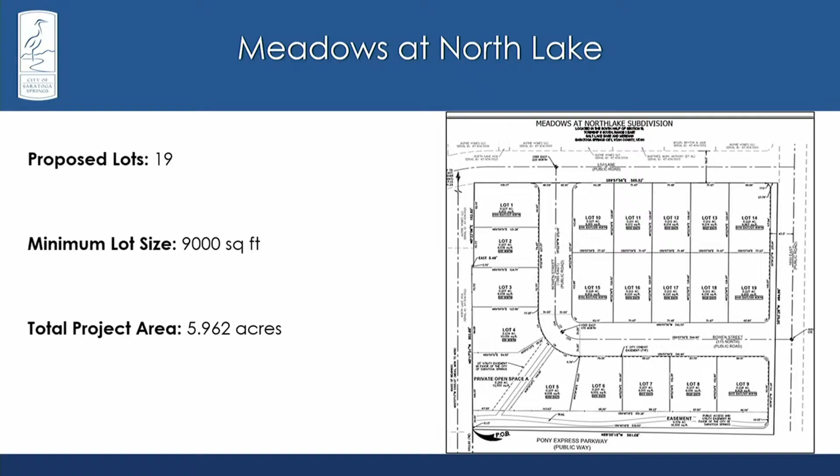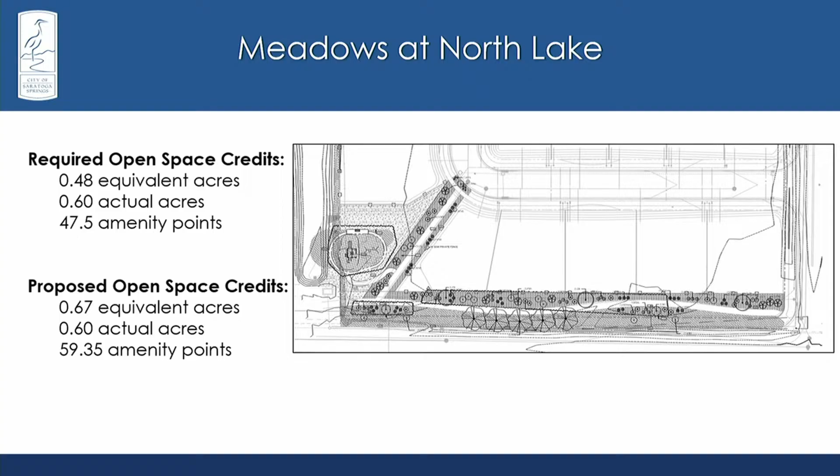This is just showing that it meets the open space requirements and all the proposed landscaping, and it meets all of our amenity points, and everything complies with our code there. So that's all that planning has.

Is the developer here tonight, and would they like to add anything to the presentation? Come on up, and if you can just state your name and address for the record.

Keaton Morton, 1987 East Brenner Street, Saratoga Springs. Just want to thank your staff, they've been fantastic to work with. This is like the 5th project over in this area that I've done, and your staff's awesome to work with. So, no question, but do you guys have any questions for me?

We'll go ahead and open for commissioner comment and see what we got. Commissioner Hill: Sam, thank you. As I was going through the details of comply and not comply, there was something that talked a little bit about size, height, and drainage, and a 3-foot fence and grading that shall comply. Can you talk about that? I'm looking for where.

It'll take me just a minute, because everything was compliant, shall comply, everything and/or comply. But there was just, as I read through it, it talked about fences being 6 foot, but there was a place that talked about a 3 foot high fence and grading. It wasn't that important to me, but I just wanted to make sure I understood that. Yeah, so I believe I should have changed it to comply, but I believe I had some shall-complies, and it was more so just, as long as, because engineering was doing the review at the same time, making sure that it complies with engineering and everything in regards to drainage. So it does comply.

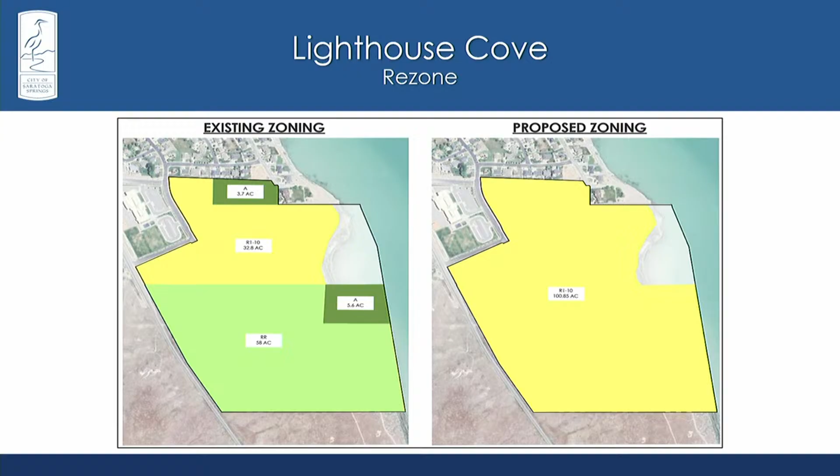Okay, good to be back. So this is for a rezone, and concept isn't required, but felt like the concept would be very useful, so it's also included for this rezone. So it's proposed for the area just on Schooner Drive. There are 109 acres, currently part of it is zoned R1-10, but also agricultural and rural residential. So the proposed zoning is R1-10, which matches the general plan, so it would all be changed to R1-10.

And for the concept plan portion, the proposed is 197, or it may be more depending on the applicant. They are working with the church to see if there's a potential church site. So depending on if there will be the church or not, there would be a few more, up to about 215 lots if they do not do the church, but if they do, then it would be 197. We're currently working on our development agreement with that language. The minimum lot size for R1-10 is 10,000 square feet. Here's what they have as their concept plan. That's all that planning has right now.

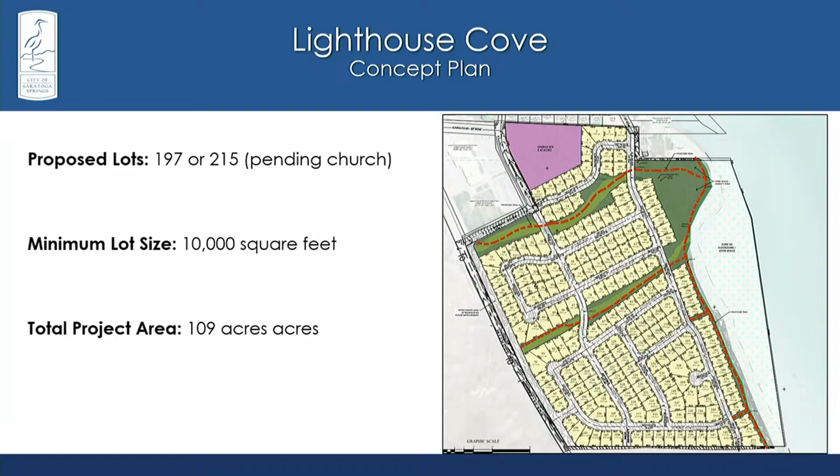Okay, we will open for public comment. Seeing none, we'll close public comment, and if the applicant would like to add anything to the presentation tonight, they are welcome to join us.

Please state your name and address for the record. Lindsay Neve with Perry Homes, located at 17 East Winchester in Murray, Utah. I don't know if there's anything necessarily I'd like to add other than we're in general conformance with the general plan, and we are looking forward to continuing working on the project.

Okay, thank you, we'll go ahead and open for commissioner comment. Commissioner Hill: thank you, Sam. Again, this is a concept plan, so it's just kind of dipping the toe in the water and getting an idea of what needs to be done. As we read through that, we see so much that still needs to go, and not to be critical on any of that because we're just starting. But could you give me the average density for the area? I didn't see that in the write-up.

Yes, let me find it on their concept plan image on the side margin. It states 197 units with a density of 1.8. Sorry, lot per unit count is 197. Apologies, so 1.8 - if it's 215 it'll be a little bit more than that, but because it's a single-family product with larger lots, it's pretty low density.

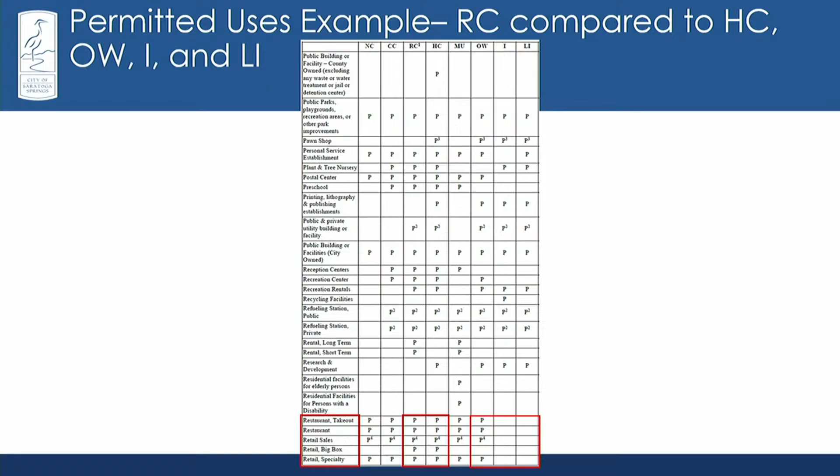Good evening, Commissioners. Yeah, so when we do code amendments, we don't always see the unintended consequences. So these were meant for the additional standards, meant for big, huge office warehouse buildings, the large, gigantic ones. The thing is, in these zones, you can also have restaurants and retail, little small stores and stuff like that. So that's what those are. So this is what they, some of the things that they require, the additional standards.

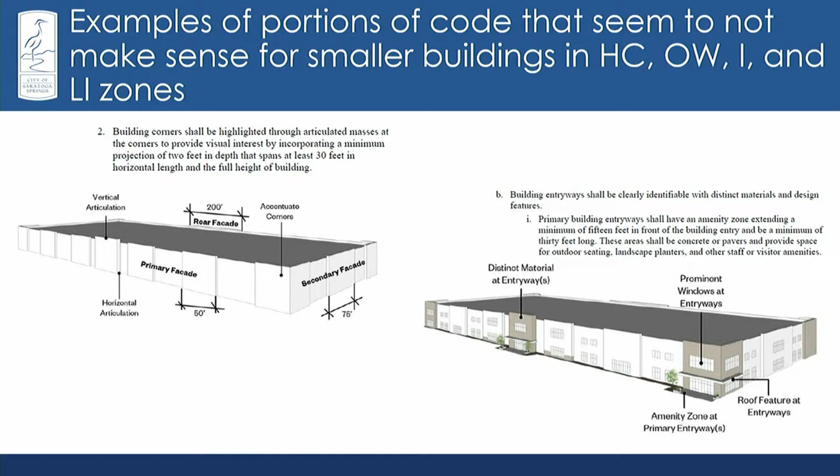So it's additional corner accentuation and stuff like that. And then these amenity zones where it's 30 feet wide and 15 feet deep of extra attention to the main entrances. Well, you get these smaller buildings that may have 3 to 5 businesses in it, and they may only be 180 feet long or 160 feet long. Well, now 30 feet of that for each one has to have that zone. So really, the whole front of that building has now become a huge amenity zone.

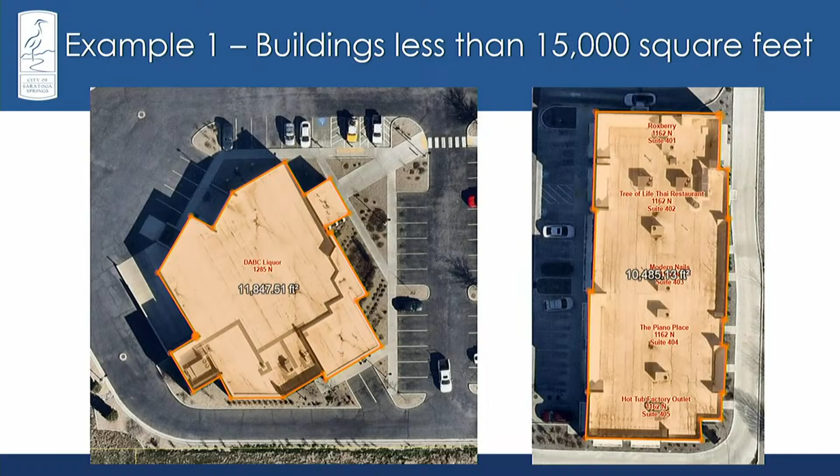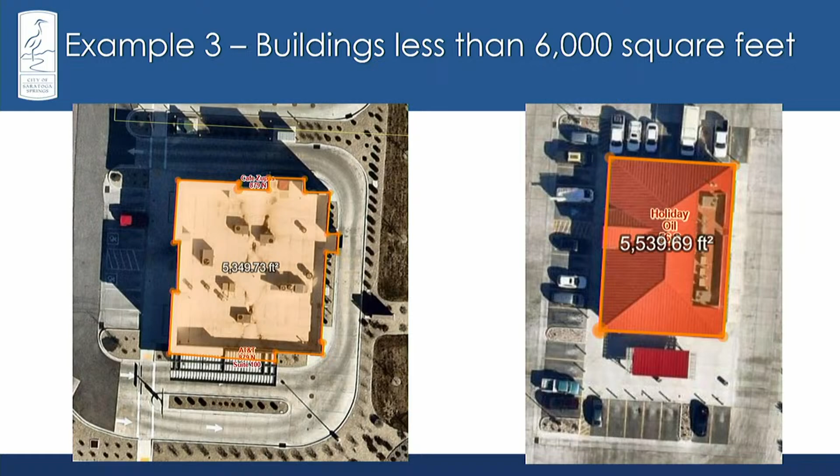So I put some examples of buildings that are less than 15,000 square feet, so you can get an idea of what we're talking about here. So this liquor store is under 12,000. This one over here is Roxberry, that Thai restaurant and stuff like that over kind of by Mobetis. It's 10,400. Frontage-wise, it's only 124 wide at the liquor store, 160 at the other one. These ones are less than 6,000. You have your Holiday Oil, and then your Zupas and AT&T, they're less than 6,000.

But if you look at the entrance on this one, for Cafe Zupas, you have 2 businesses, so you'd have 60 feet of that frontage that would have to be amenity zones. So really you have 18 feet that isn't. So it doesn't make sense for these smaller buildings.

So what we're asking for is an exception: if you're smaller than 15,000 square feet and your frontage is less than 200 feet wide, those additional architectural standards do not apply. They still have to meet all the other site and architectural standards, just not the additional ones meant for the huge buildings.

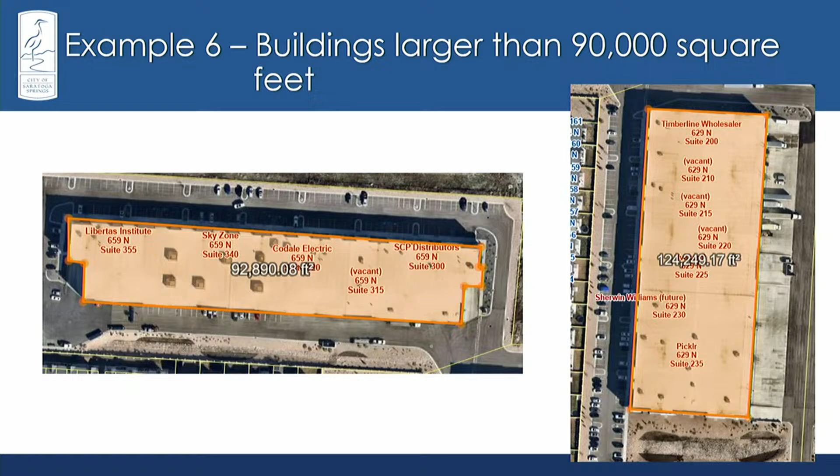So the example of the big ones - you have the one over by Sky Zone, that's North Shore Commercial, it's 92,000 square feet. The one south of that, also North Shore Commercial, is 125,000 square feet, 700 feet wide, 550 feet wide. That's more what we're looking at when you do your amenity zones for the bigger ones.

Do you have any questions on that? Let's open up for public comment first. Seeing none, we'll close public comment and now open for commissioner comment.

Commissioner Rather: Thanks, Kendall. I appreciate it. I work in this particular zone currently, on some projects of my own. I think it's totally applicable - in fact, personally I think it's still a little on the long side for the amenity zone, but I think it's a good improvement because, like you pointed out, some of those buildings it just doesn't make sense. So anyways, I just want to support it. I think it makes a lot of sense. I appreciate it, thank you.

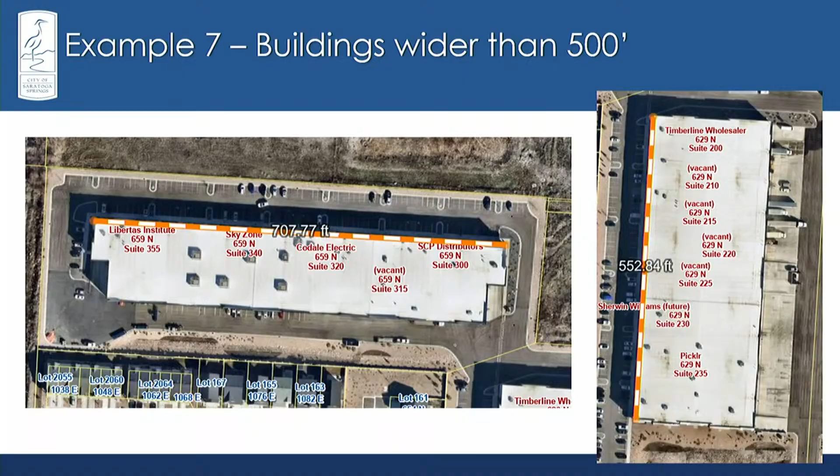Where you feel like it's a little on the long side, is it worth discussing other things with this at this point? Well, I just mean, for example, you showed Zupas, I don't remember the exact length, but 80 feet. So it's still under, because you took it up to 200. If you feel there's a different suggestion to make - no, actually that does seem appropriate.

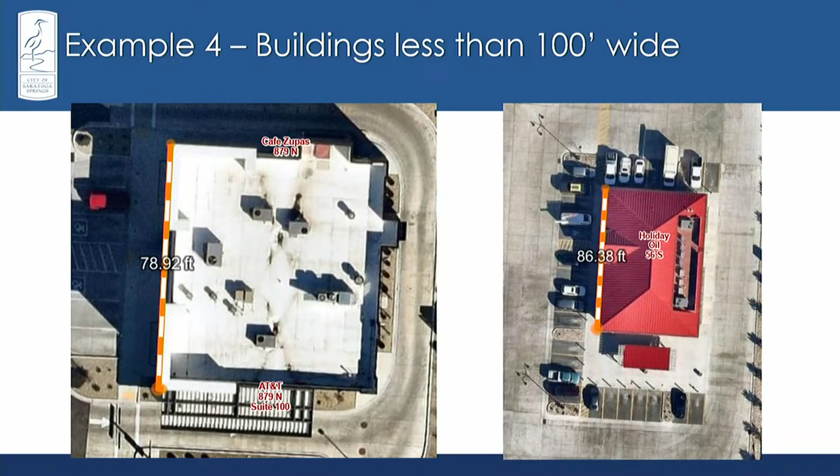Perfect, thank you Commissioner Rather. Any other commissioner comment? Okay, seeing none, we'll go ahead and entertain a motion.

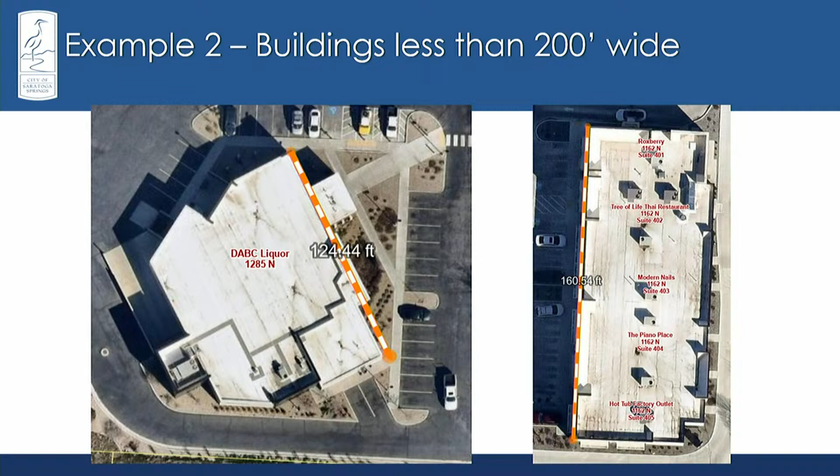I move that the Planning Commission forward a recommendation for approval of the requested code amendment to Chapter 19.16 with the findings and conditions in the staff report. Thank you, Commissioner Hill. Do we have a second on that motion? I'll second that. Got a second from Commissioner Wilden. Any questions on this motion?

Okay, hearing none, we'll now vote. All in favor say aye. Aye. Any opposed? All right, that passes unanimously. And that is the end of our